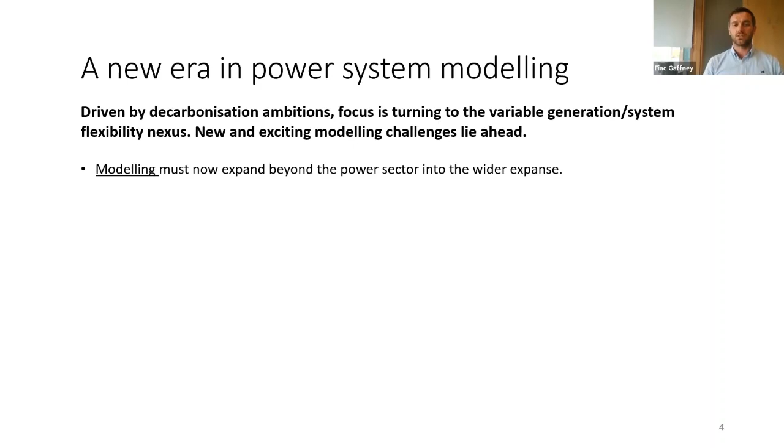And I suppose moving forward, then our focus has to go beyond the power sector. The power sector is the equivalent of around 20% of all energy used. So we need to go wider into the other sectors. To do this, storage is obviously very important, and seasonal storage is really a new challenge for us. And then flexibility in around the demand, and then different types of generation that we're going to talk about, and we have to be ready for when they come online.

And all these things then are brought together when we look at system operation. When you have a lot of variable generation, we have to be able to look at the frequency stability of the power system, and then equally important is the portfolio adequacy, and we will touch upon these things as we go through the presentation.

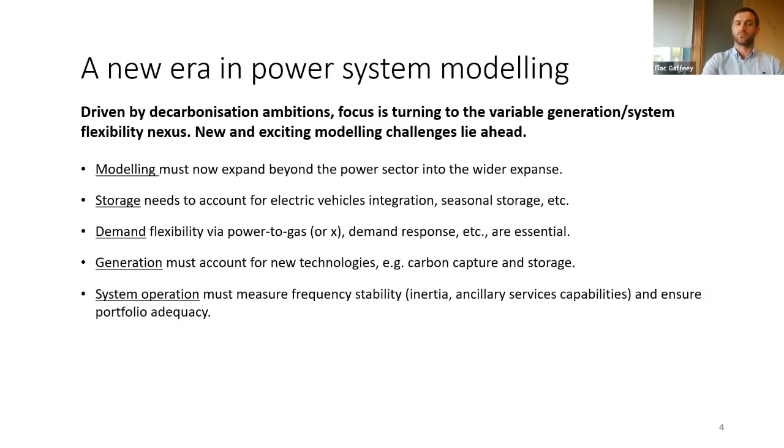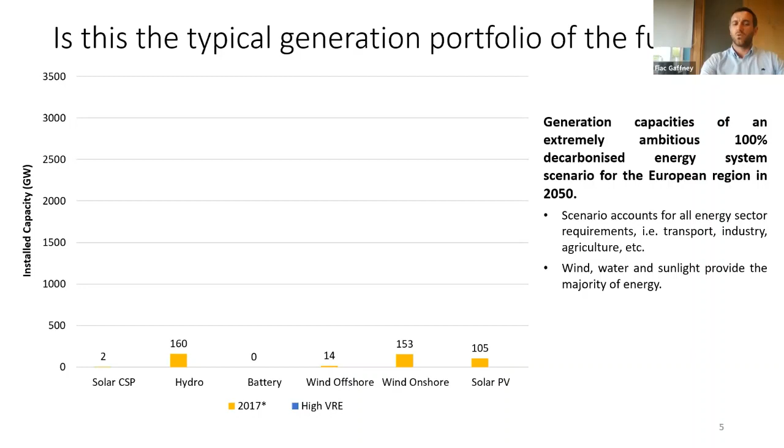Just the next couple of slides, I'm just trying to lay a scenario out that we are modeling at the moment, and it's looking at, I suppose, an extremely ambitious scenario. Sorry, can I? Yeah. So it's a 100% decarbonized energy system for the European region that we're going to look at. And if we just compare to 2017 installed generation capacities, we can see here that there is a significant increase in variable generation. And here, just to draw your focus, that's the equivalent to 82% of the portfolio is variable renewable energy.

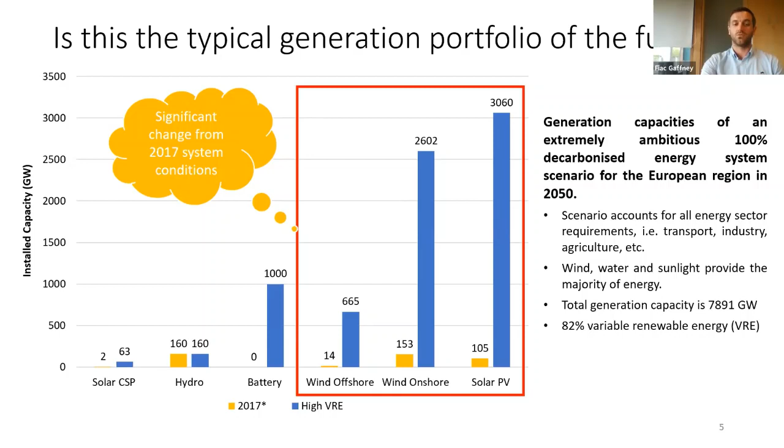This obviously is creating a new need for robust results and for understanding the challenges ahead from an operational point of view alone. When we look at storage then, we compare 2017 numbers, where really we have little or no storage other than pumped hydro. And here I'd like to point out that the STES is short-term energy storage, and the UTES is underground thermal energy storage. So both of these are thermal, but we'll come back to that because they play a large part, especially the underground thermal energy storage.

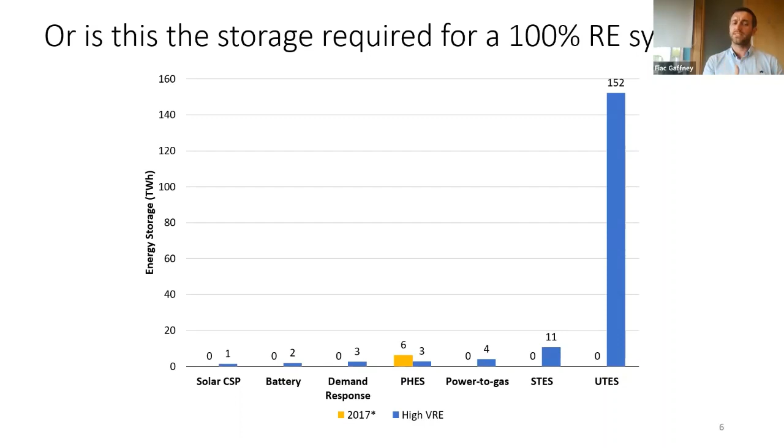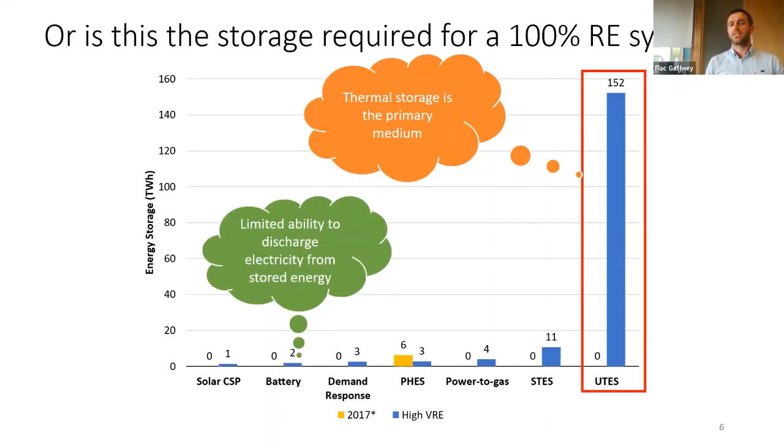So we can compare then the 2017 and this high variable renewable scenario. We can see that a very high percentage of storage is thermal. And that brings its own problems, because if we can't store energy and then convert it back to electricity, we have a big problem. And that's, I suppose, what we are seeing here, that void in technologies that can bring energy back into power. We can assume that power to gas produces hydrogen, which can be converted back. But this is a published scenario that we are aligning with, and they assume that the hydrogen from power to gas is only used for transportation.

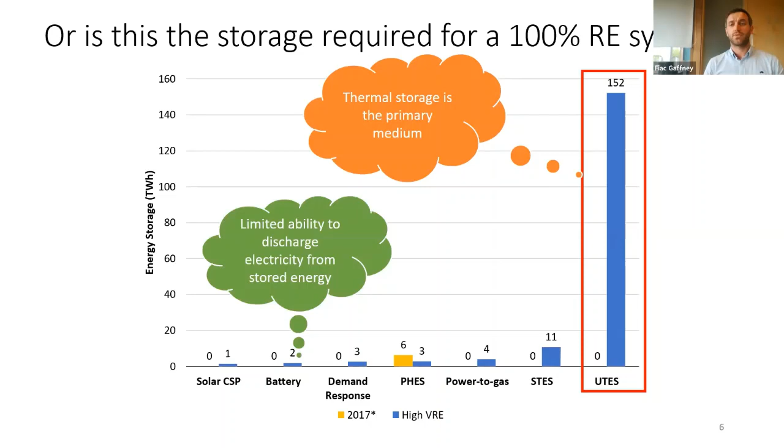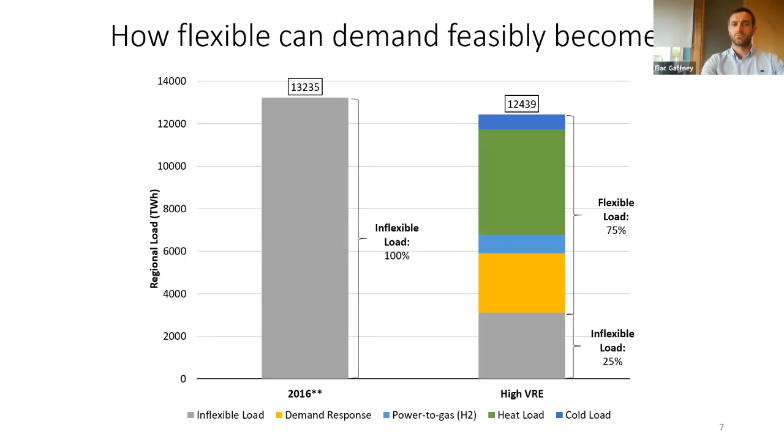So when we model this scenario, we're looking at the entire energy system. The transportation sector is accounted for in the power sector because of electrification of vehicles, and the remainder is based on hydrogen. So we have to look at this thermal aspect and try to include the thermal sector and model that as well as the power sector. And that's what I'm going to show you now, how we actually do this. Inside a region, here we see the French region, and we have two nodes, a power and a heat node. Inside the nodes, the power node is set up exactly like any power system generally would be. You have generators, purchasers, which are demands, batteries, interconnectors.

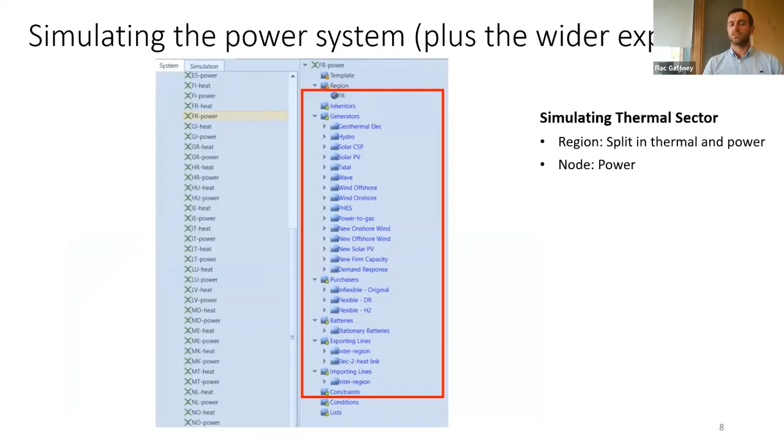It's very standard. Inside the thermal node then, we have thermal generators. So we have geothermal heat, we have solar thermal, and then we have the underground thermal energy storage. We have purchasers, we have batteries, and here, well, we say batteries, but really this is storage, and we use that for short-term energy storage. And excuse me, in the latest versions of PLEXOS, you can actually change the class names, which is fantastic, because it's a way of documenting your model without having to write up a full document. It will help make it understandable to someone that's not used to the model.

Yeah, just jumping in there, Fiac, you folks are probably looking at some of those capacities and going, wow, they look really crazy, really extreme, and they are, and they are like that on purpose for a couple of reasons. One, this is looking at a fully decarbonized energy system, and I think what's really exciting about using PLEXOS this way is that you can jump beyond your comfort zone of just the electrical power system, which is, as Fiac said, 20% of the energy we consume, and look at the other 80% of the problem.

Interestingly enough, as Fiac mentioned, when we started this research maybe a year or two ago, there wasn't a dedicated heat node within PLEXOS, but the newest version of PLEXOS now has a dedicated heat node. So as PLEXOS users, we'd encourage you all to explore some of these things, because it does open up a lot of really exciting avenues for exploring what the future power system, but more importantly, what the future energy system could look like.

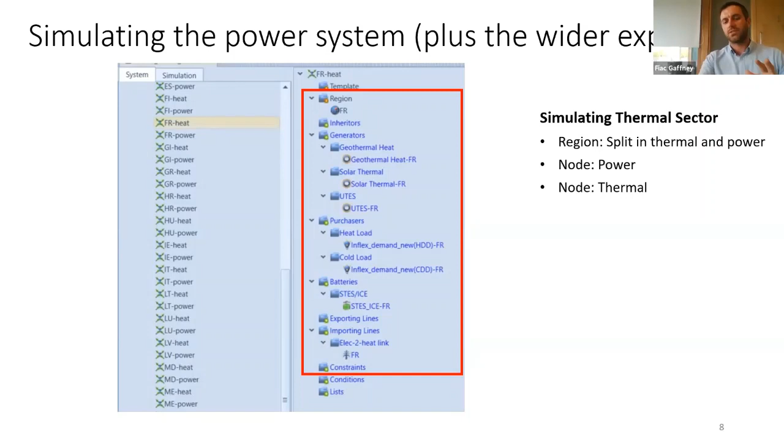And then just to tie off this representation of the thermal sector, there's one missing link, and that is the link between nodes. And that's what we're talking about here. We're going to show the intersectoral unilateral flow of energy. So electricity, if there's excess electricity, rather than curtail that energy, it is stored as thermal energy in seasonal storages that are outlined by the source material.

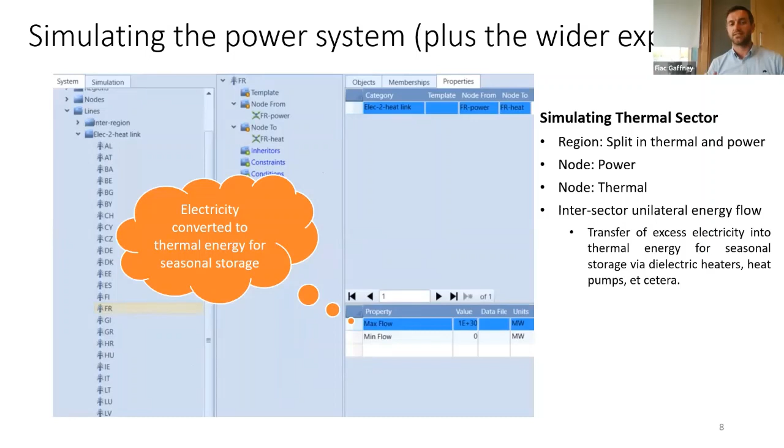And how that transformation happens is through dielectric heaters, high efficiency heat pumps, these sort of technologies that are already on the market. So what we're seeing here is that if there is excess electricity, it can be stored as thermal, but it cannot be reversed. And that's the key point that we're trying to get across. So that's a very, it's an important assumption.

Yeah, and this is one of the fun things you can do with PLEXOS, with the ability to have your own constraints. And I guess one of the lessons we learned pretty early on is, if you're going to put in constraints like this, it's really fundamentally important to have a look at the LP equations. Look at the linear programming equations through the inactive diagnostic.

And there's a really cool feature that Energy Exemplar posted up on their website, where they have a syntax reader. You can incorporate that into your text editor, and that really makes life reading the LP files a lot easier, because sometimes those constraints can be quite tricky. They might not be doing what you think they're doing. So if you are setting up new constraints with different technologies, new technologies, it's really worthwhile to have a look at the fundamental equations driving those before they get to the optimizer using the LP viewer.

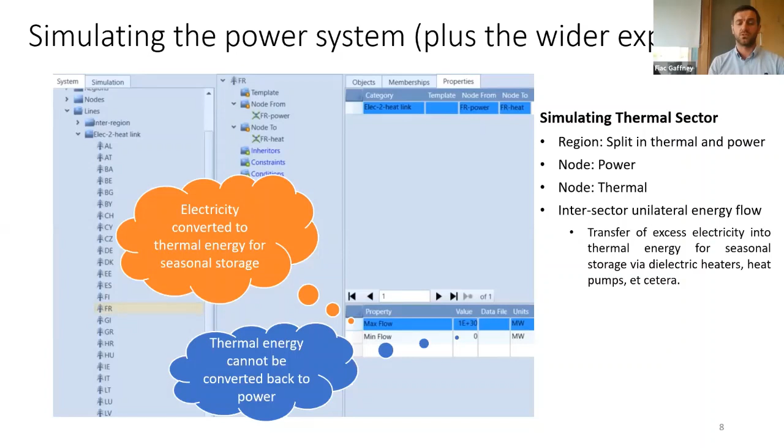And it's often better using a small model, isn't it? The smaller the model, the easier, the more transparent things are. And that's what we try and do with pretty much every new technique that we use, because otherwise you just get lost in the data.

So in terms of flexible demand, this is modeled in a different way. What we do here is a unique approach, but I'll talk you through it in a moment. So hydrogen here, the assumptions are that hydrogen is created from power to gas for transportation purposes only, and not demand response. And one of the key things I want to get across is that demand must be met using previously stored hydrogen, or hydrogen converted at the time of demand.

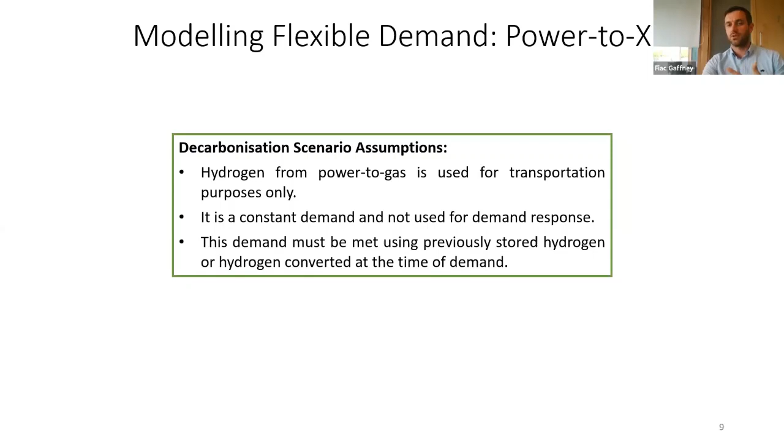And that may seem obvious, but it is very important to remember when you're setting up flexible demand in the way we do, which may not be the correct way, but this is the way we do it. So our approach is that flexible demand is modeled in two individual parts. Firstly, you have the demand, which is static; it's in the purchaser class, just the way any demand may be. And in this scenario, it's a constant load.

We assume that hydrogen is needed all across the year at the same demand. However, you can input a CSV file here with a profile. It doesn't really matter to us. It's more about aligning with the approach that we are trying to replicate.

Flexibility then is the next thing, and flexibility is modeled in the same way as pumped hydro is, where you have an upper and lower storage connected with a turbine in between. And this is the way battery technology used to be represented in PLEXOS until the battery class was created. So here we can see the max capacity is 102 gigawatt hours, and that is aligning with your assumptions.

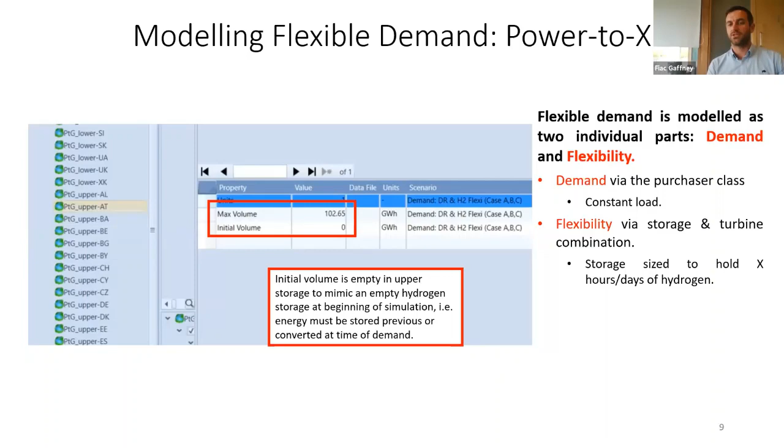However, what I would draw your attention to is the initial volume is 0. So the upper storage, which we're looking at, is empty at the start of the simulation, and then that has to fill up before it can be used. We can see here that the lower storage is full, so it's ready to pump up. And this is just something that we wanted to mention before we move on.

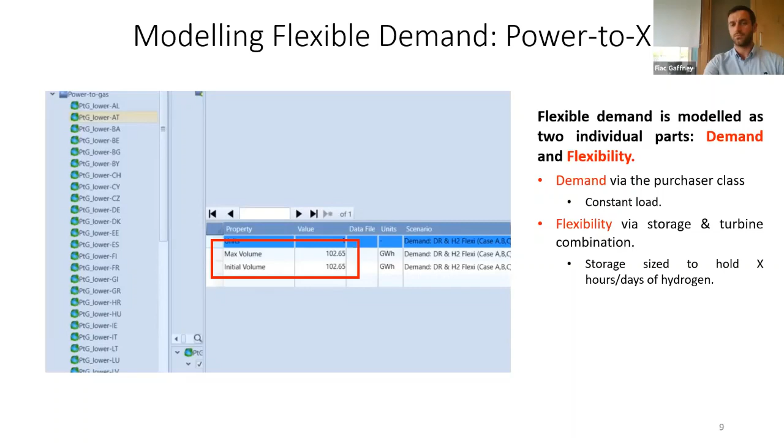Yeah, I guess maybe just jumping in there, Fiac, that's something that we'd probably like to see in future versions of PLEXOS, this power to X class. As Fiac said, before a lot of us were modeling things like batteries using dummy pump storage technologies, and that's fine, but often when PLEXOS incorporates those things as a fixed class, it just makes the whole thing a little bit more elegant, a bit more tidy, and a little less clumsy. So maybe power to X is one of those things.

Certainly not within the investment cycle, but it's probably coming through in the next maybe 10, 12 years, probably in Europe. So that's something maybe that we could think about as a community as well, I guess.

Yeah. And finally, just to tie off the link, to show you the link between the demand and the flexibility when you're replicating this, is the fixed load for the turbine that's associated with that storage. That has the same fixed load as the demand. So what we're saying here is that demand is

2.138 gigawatts constant, and the output of that turbine, which has flexibility incorporated because it has an upper storage and lower storage, has the same output. So that's the link, the missing link, if you were maybe struggling to find out how they work together.

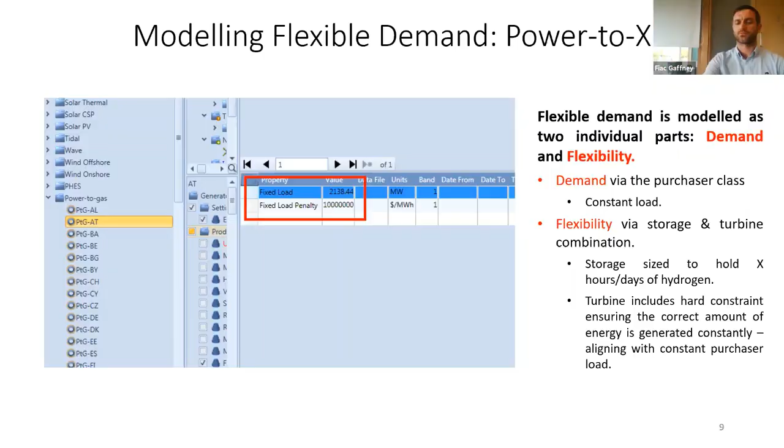So next, from an operational perspective, we're going to look at, when you have a system that is 82% variable renewable energy, the questions are, where's the inertia coming from? How can you control such a system that has very little synchronous energy? And that's what we're going to look at here. We're going to focus on the Central European continental synchronous area.

What we then do is add some dispatchable power. Approximately 8% of installed capacity is replaced with dispatchable capacity. And we do not talk really about what type of dispatchable power, because it's all about the effects of it, whether it's nuclear, CCS, coal, whatever.

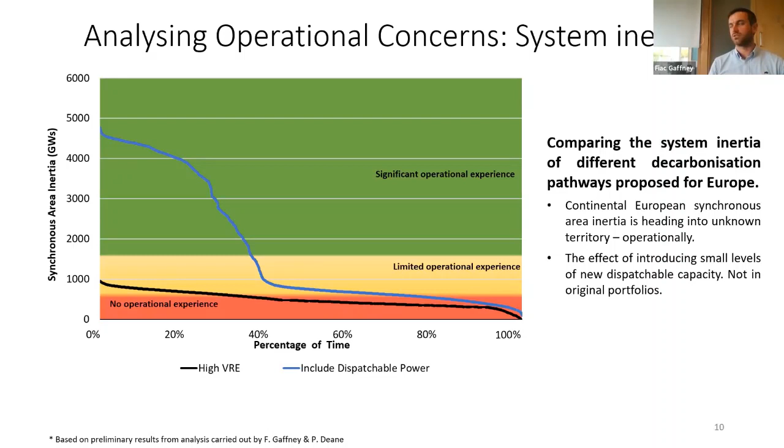I guess what's nice about this technique is that while PLEXOS isn't a dynamic electricity modeling package in terms of some of this sub-grid stuff, looking at issues like inertia or RoCoF is very useful in PLEXOS, because it's about raising flags. So if you're dipping into that red zone, that means, okay, I need to start worrying about this issue in a lot more detail.

So certainly I think the work that Fiac has done here is very insightful for understanding where the power system can comfortably operate and where that becomes a little bit more tricky and challenging.

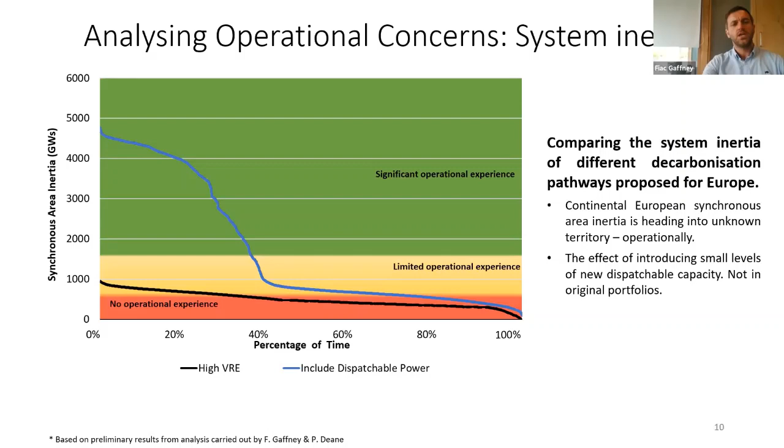Yeah. So next we're going to look at ancillary services, because again, going back to our scenario where 82% of installed capacity is variable renewables, the questions then are who's providing reserve and how. So to lay a little bit of background, we are looking at a combination reserve which combines secondary, tertiary and replacement reserves. And we are focusing on upward regulation because it's the more challenging, because for downward regulation, you can possibly curtail and just dispatch down plants.

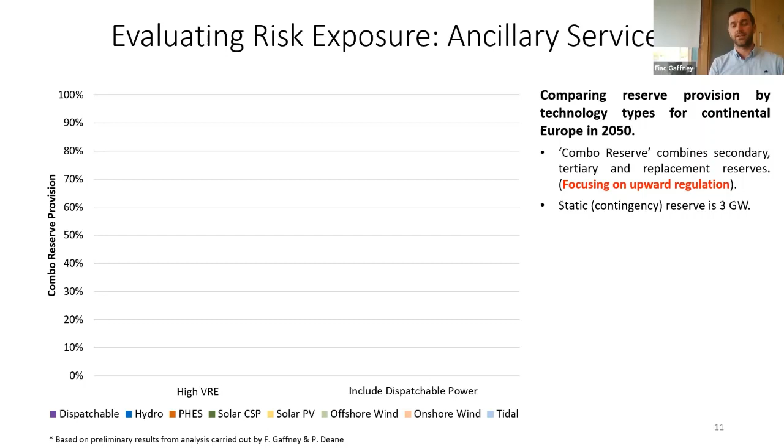So there's two things I want to talk about. The first thing is that we assume a static reserve of 3 gigawatts for mainland Europe. And then, this is something unique, we're setting a dynamic reserve, which is a percentage of generating variable renewable energy. This methodology is from published data, and we use a very unique way of setting this reserve, which we'll talk about in the next slide.

But in this slide, we just want to point out who is providing the reserve, what are the issues, and then what are the effects if we tweak that with a little bit of dispatchable power.

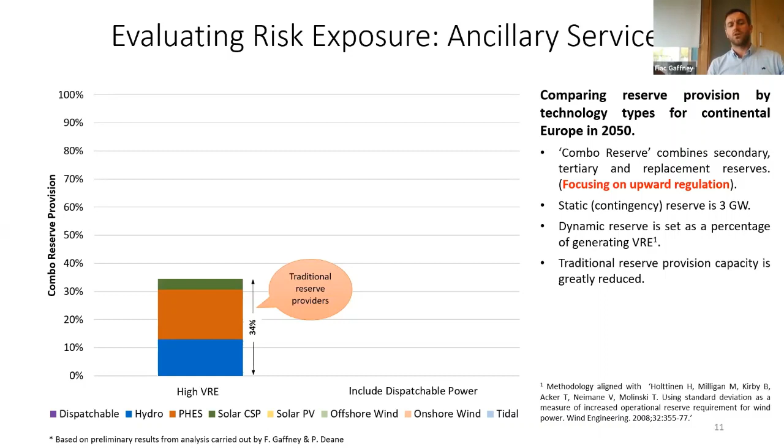So here, first of all, we're looking at the high VRE scenario, and I've grouped together 3 generation types that I call traditional reserve providers. And it's not very accurate, because pumped hydro is traditional, we know how that works. Concentrated solar power is a technology we understand, and that's why it's grouped there, because the alternative 66% comes from deloading variable renewable generation.

And just to identify what that exactly is: if you have a wind farm that can produce 100 gigawatts, or is forecast to generate 100 gigawatts in hour 1 in any day, that could be deloaded back to say 90% of that, with that 10% there for upregulation, for injecting power into the system. And that's kind of unknown territory. There are a lot of pros and cons to that, but it's just unknown territory really is what we're saying, and we're trying to flag these issues with such an approach.

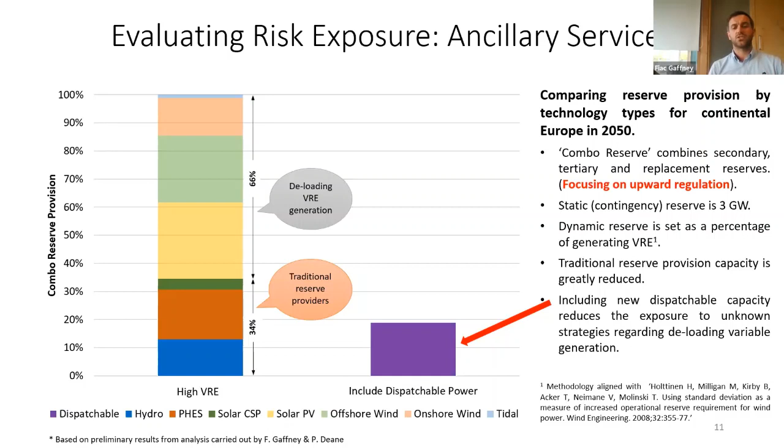So what we do then is we suggest a level of dispatchable generation, as we did in the last slide. So here we say, if there was that 8% of dispatchable power, it provides nearly 20% of the reserve requirements, but there's a knock-on effect that because this power is generating, it's displacing some of the hydro and pumped hydro and solar CSP generation, and then that can be kept for reserve. And as we see here, instead of it being 34% of reserve coming from traditional sources, it's now 85%. So the risk here is much lower in terms of the unknown strategies of how to deload variable renewable energy.

What I like actually about the way Fiac has set this up is that because it's an integrated overview on the full energy system, there's also things like power to gas in there. So in Europe at the moment, we hear a lot of business cases about maybe curtailed renewable energy being sent for free to provide power to gas. But this decision support tool that Fiac has set up here also allows us to understand if you are a wind farm operator, well, if you deload your generation, rather than send your electricity for free for power to gas, maybe there's a bit more financial gain from actually deloading that and holding it as a reserve capacity as well. So I think that's a nice and new insight coming from this analysis, and it raises new questions.

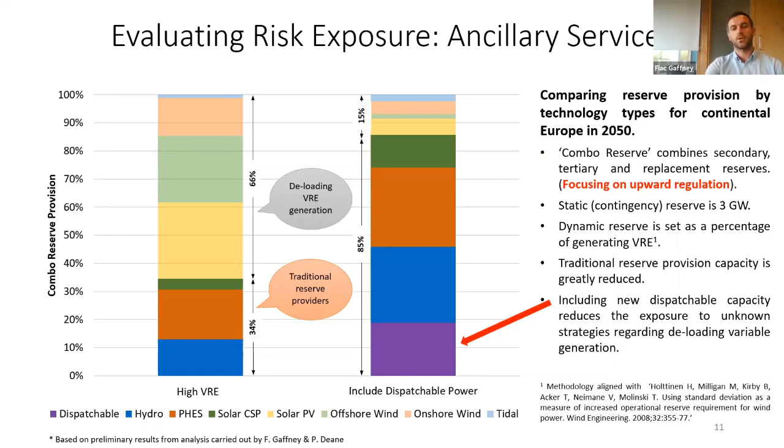Now, how we actually implement this in the software is in PLEXOS, so we're looking at using variable renewable energy to set the reserve contingency. So here, first of all, we use a dummy generator, and this dummy generator is going to be a signal to reserve and tell the reserve how much it needs to account for as a dynamic reserve. And here we set a dummy generator, and the main thing here is that the max capacity is larger than the combination of variable renewables in a given area. And a given area is whatever area you are talking about in terms of the reserve. For the UK or GB, it would be Great Britain and the accumulation of variable renewables in that area.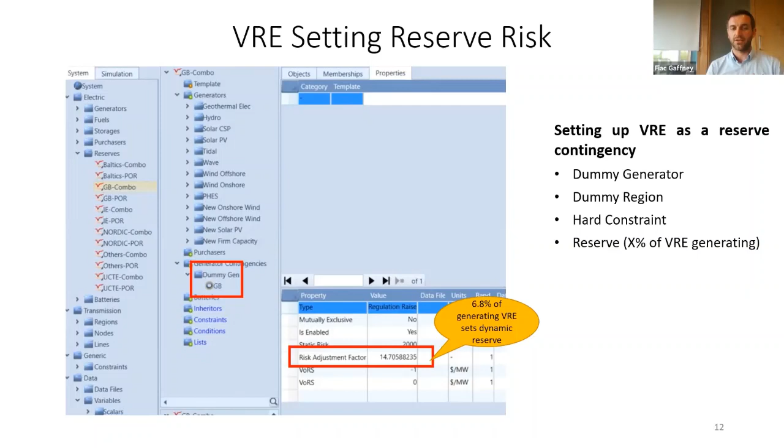Now, the next section, we're going to talk a little bit about the robustness of results. And what we're talking about here is going back to this scenario that we're talking about throughout, where we have high levels of variable renewable energy. When you have a lot of weather-dependent generation, it means you have a lot of variability, and to account for that, you need loads of sensitivities, and the robustness of results really needs to improve. And this is what we are trying to show you, how we approach this.

So we use a multi-sample approach for power generation representation, and we're looking at interannual wind and solar variations. So we're taking profiles for over 30 years, so we use 30 years, but you can use as many as you like; that's only dependent on the data you have. Here's two examples of publicly available data sources, which are fantastic sources to use if you want to even trial this approach.

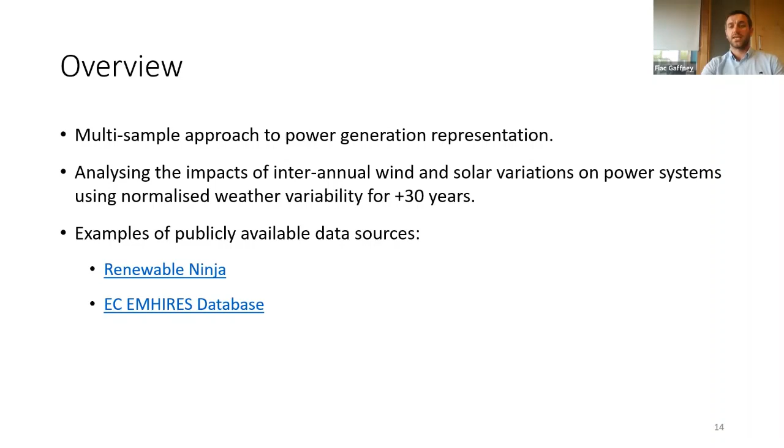So one of our colleagues, Sean Collins, published a fantastic paper in the Joule journal in 2018, where he's looking at the impacts of interannual wind and solar variations on the European power system. The scenarios he's using are from the European network of TSOs, and it's all about decarbonisation and different trajectories. And we'll talk through just a couple of his findings, which graphically is very rich.

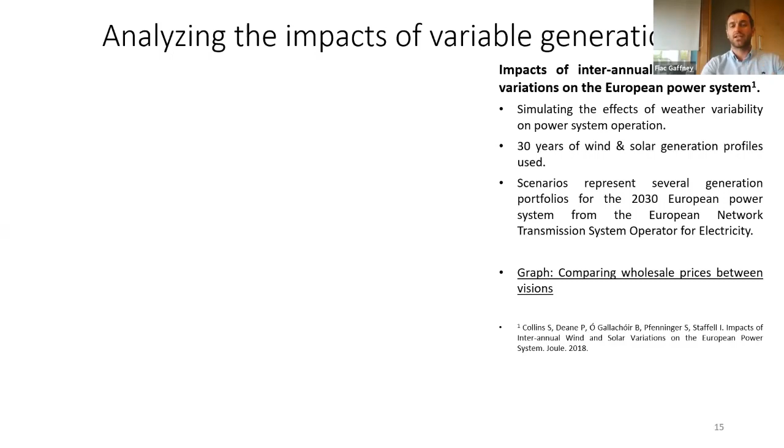So here we are looking at the wholesale pricing of the counterfactual. Along the horizontal, we have the penetration of variable renewable energy, and on the vertical, it's the wholesale pricing. What we actually see here is a clustering effect of the 30 samples, and that is just down to the installed capacity, and then we just use the different profiles for the last 30 years. From this clustering you can get confidence, because we can find out the mean, the standard deviation, the min, the max. All this data is there, and that's just one scenario. You can compare that then to a second, a third, a fourth, a fifth, and this is all fantastic stuff because it's very rich in detail.

It gives you confidence. If I was an investor into a market, you look at this and you have some idea of where wholesale prices are going to go as the penetration increases, all else being equal. And the thing here is that we're entering a new world where there's lots of variable renewable energy. I'm not sure what Paul thinks, but using single profiles doesn't really cut it anymore. For robustness, you may need to add that extra level of detail.

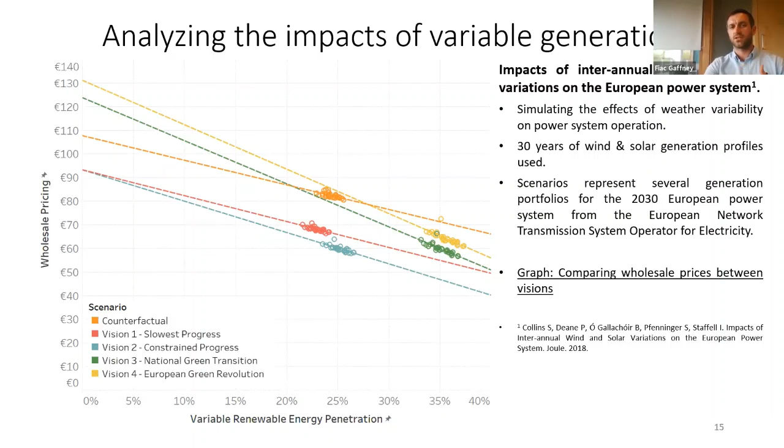So moving on then, this is also from Sean's paper where he looks at the CO2 intensity. Again, we're just going to touch on this for a moment, but you can see from the 5 scenarios this clustering of results where you can get your mean, your standard deviation. It just provides confidence, is the best word I can use, in your results.

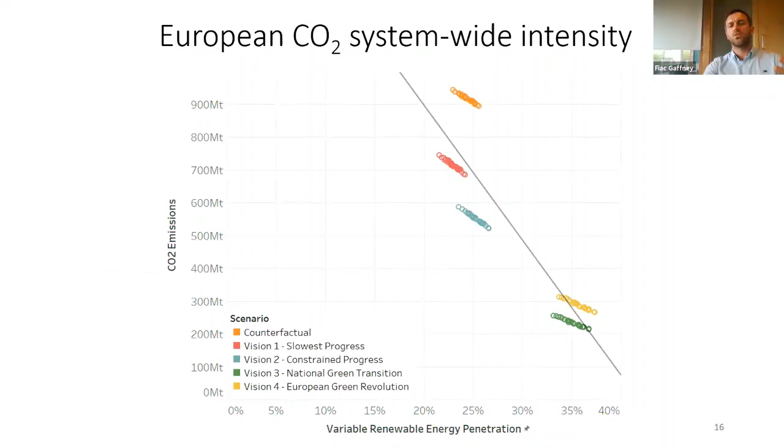So now we'll just talk about, oh no, sorry, one more slide. This is based on results Paul and myself are currently working on. This is the same scenario as we talked about earlier, and here we have 30 individual samples as columns. This is the level of variable generation of total energy system demand, a little over 80%. When we add dispatchable power to this, it's about 90%.

But straight away, you can see that there's an adequacy problem. So you can have questions then: is the portfolio not adequate? Why is it not adequate? Is there not enough storage? And then we see, well, curtailment is actually low, so even if there was more storage, we wouldn't solve the problem. So a lot of questions can be answered, or can arise, from this sort of analysis. From a regulator's, an operator's, or an investor's point of view, you can see opportunities, and that's really what we are seeing with this sort of work.

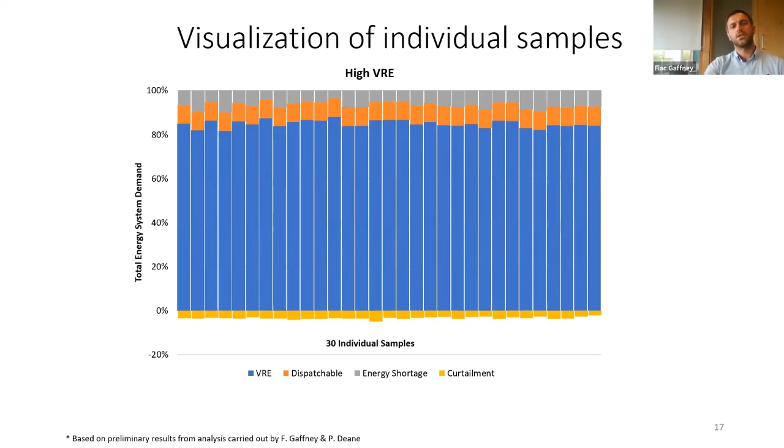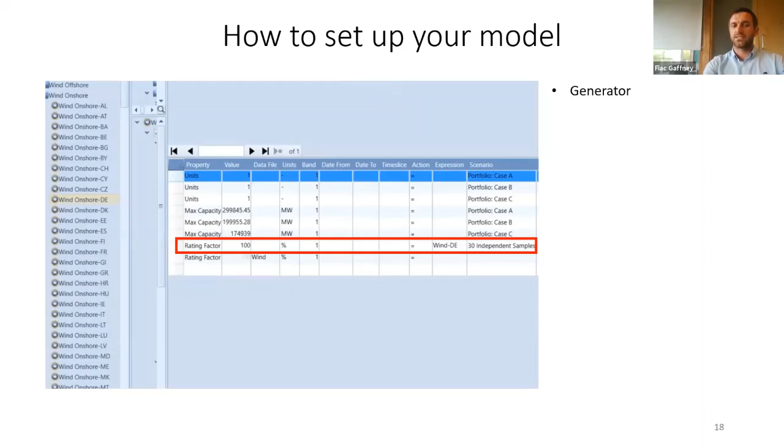So next, we'll just talk about how you actually set this up in your model, and it is very straightforward. First of all, from the generator perspective, you set up the rating factor equal to a variable. Here, this is the German onshore wind, so wind-DE is a variable. And then in the variable itself, the sampling method is user and the profile is a normal CSV.

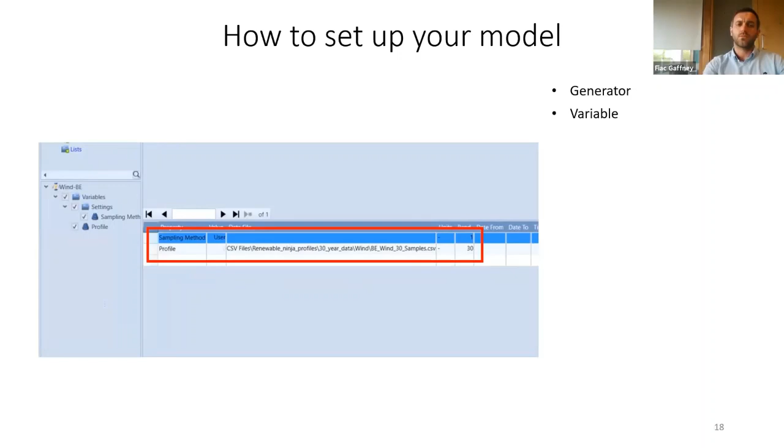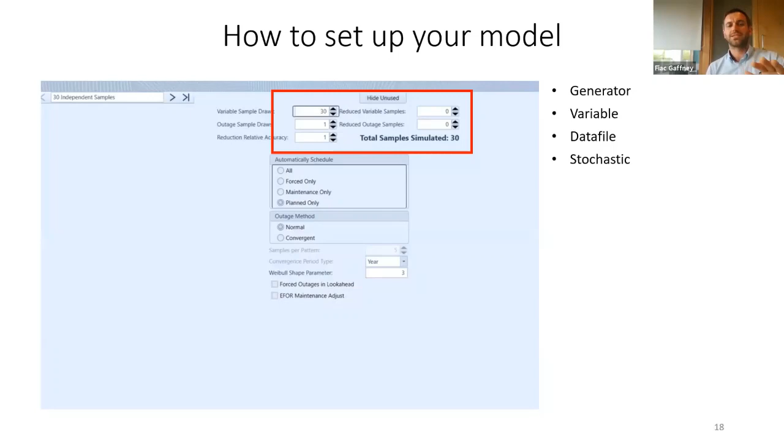The CSV is set up as per normal. It's just with the columns 1 to 30 in this case. And then we go on to the stochastic settings. And this is really where you just need to know a little bit, and that the variable sample draw is set to 30, so you have 30 samples running. And the next thing then is that in PLEXOS we're using the independent samples in parallel, and that's a key part of what we're trying to do.

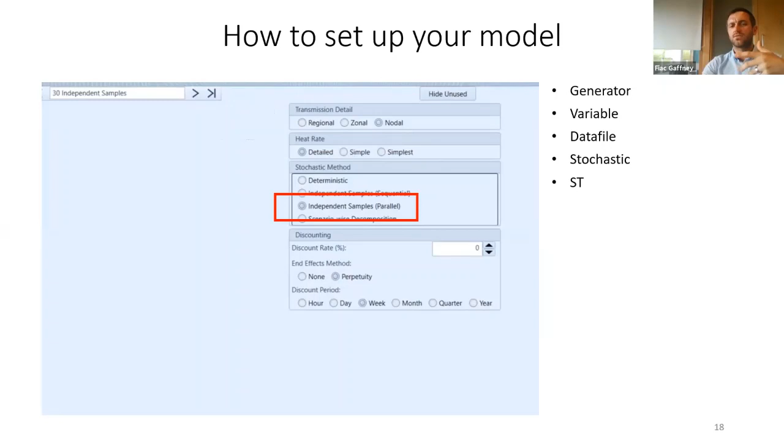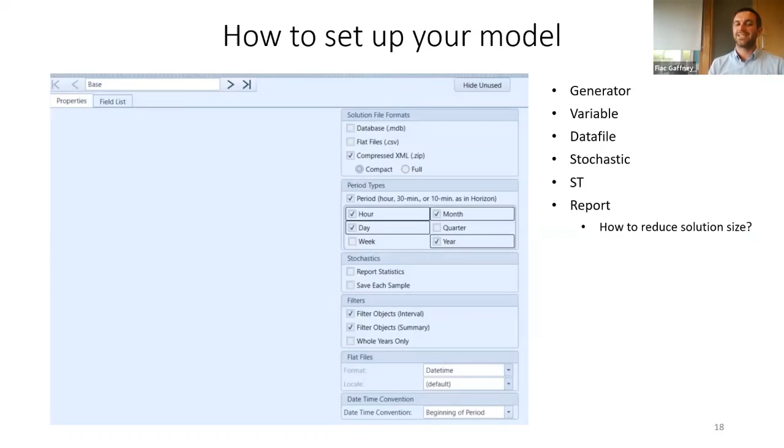From our experience, one of the things that we realized is around the reporting. This is just our experience, sharing it: what we found was when you model using this sort of approach, you have 30 times the results. And what we found is that sometimes you don't always need all the period types. So what we did is we just deselected some of them. You don't have to do this, but it just helps with the solution size, because sometimes that can be very, very large.

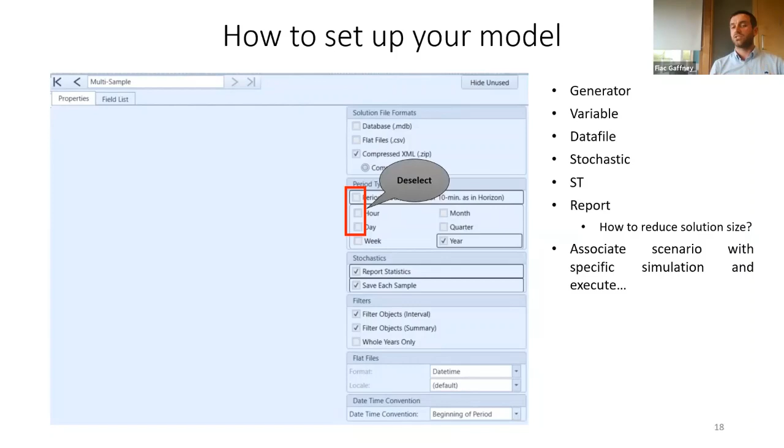So then afterwards, it's just a case of associating the scenario and the specific simulation, and then you execute, and that's really it. And that's really powerful. Fiac has talked about that in terms of weather, but that could be anything. Those independent samples could be carbon prices, fuel prices, demand. There's really a big, rich landscape to explore there with the independent samples method.

Oh yeah, actually, a nice feature in PLEXOS 8, the most recent version, which came out maybe a couple of weeks ago. I think the data handling abilities are absolutely phenomenal. A lot of traditional users would have hundreds or thousands of individual CSV files linked to individual wind farms or power plants. But the new data handling capabilities in PLEXOS 8 allow you pretty much to store all those in one CSV file, whatever your computer can handle in terms of memory.

And that's a real nice feature in terms of reducing the risk of human error, and also keeping your model nice and elegant and nice and clean. And it really gobbles up those data files really, really quickly and runs through the validation. So that's something we'd encourage users to check out as well.

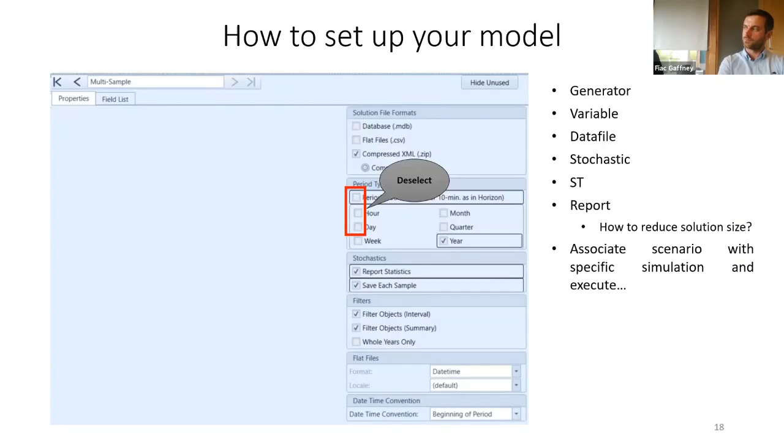And now we move on to the last section, which is high temporal resolution modeling. From my perspective, when I started modeling, we were always looking at hourly resolution models, and that's more reflective of market conditions and how a unit or a system is dispatched. But the world we're going into with a lot of variable renewables, we kind of need to start looking from an operational perspective in a little bit more detail, and that's why we are looking at 5-minute resolution modeling.

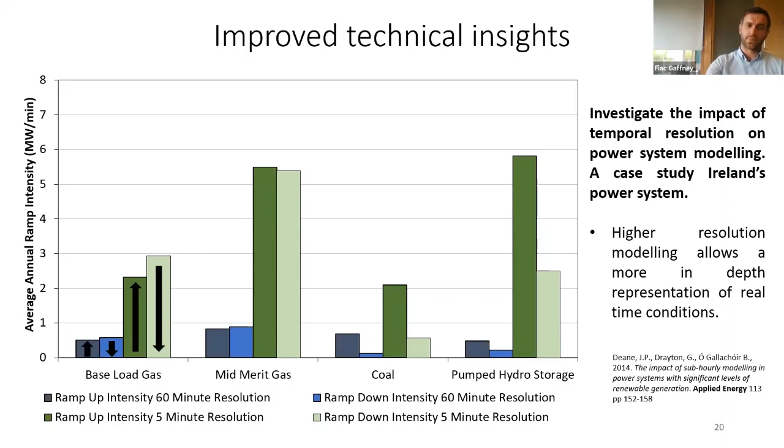The next thing now is we just kind of look at the system costs, and when you increase the resolution, what you get is, I suppose, a capture of more of the system costs. For example, we have recently finished a paper that's in review, and the difference between 60-minute and 5-minute resolution is 4.5 billion euros. That's the equivalent of 3% of overall variable costs.

And of that 3%, 1% is associated with startup costs, and the other 2 is around fuel costs and carbon. Because at the end of the day, when you are ramping your plant around, you're less efficient, so there's more of a fuel burn or fuel offtake, and then this equates to more costs, and there are a lot of knock-on effects from here.

Yeah, and this is really important actually, as Fiac said. If you're trying to understand flexibility in the power system, it's also important that you capture inflexibility. So if you have some legacy steam plants, or if you have some quick start OCGTs, you capture their technical characteristics quite adequately. And as Fiac will show next, actually, 4.5 billion. That's quite a sum of money.

Okay, it's small in percentage terms, and that's, I guess, one of the things. If you're interested in aggregate costs only at national level, you're probably not going to see a big difference in absolute changes between different scenarios. But if you're someone who's interested in storage, flexibility, those types of assets, then the 5-minute resolution modeling is something that you should really explore, and it's pretty easy to set up.

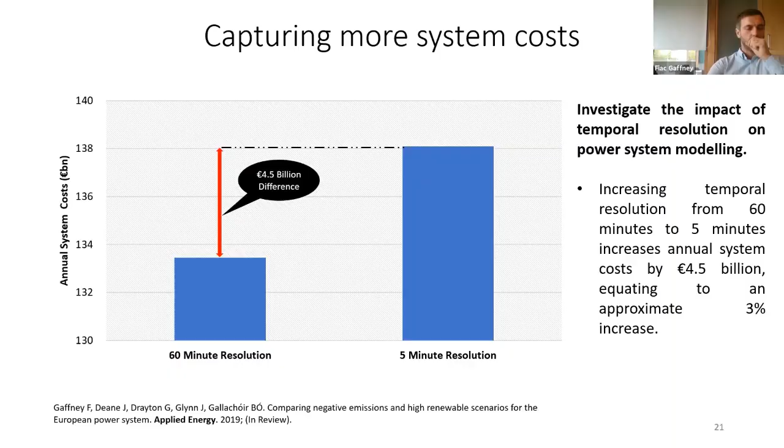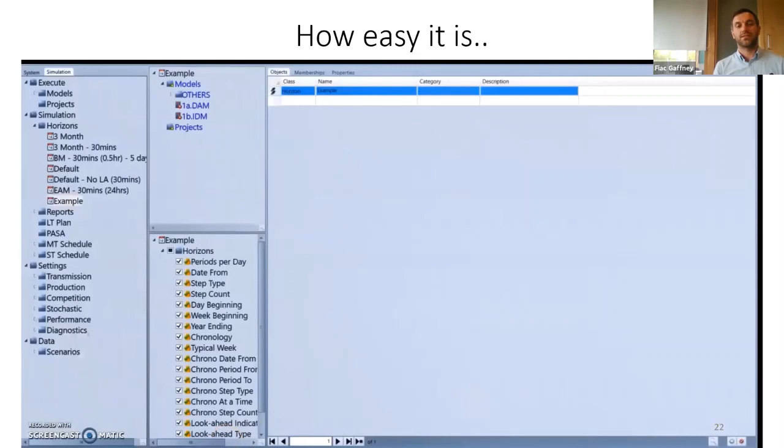Yeah, it is. So the next thing here, we're just going to show you how easy it is to actually change the temporal resolution. This is a short video, it's only 10 seconds long. So you get your horizon, you double click, and then there's a simple drop down menu, and you press OK. And that's really how complex it gets from the front end. But then there are limitations, but they're more machine based, which is different. So you might have to structure your model a little bit differently.

We recently were working with Glenn Drayton on a paper, and he suggested that we nest one model into a different model based on their temporal resolutions. So here we can interleave a 60-minute model and a 5-minute model, and the 5-minute is nested into the 60-minute. What it actually does is the 60-minute model creates a unit commitment for all the big coal and CCGT units, and then passes that to the 5-minute simulation.

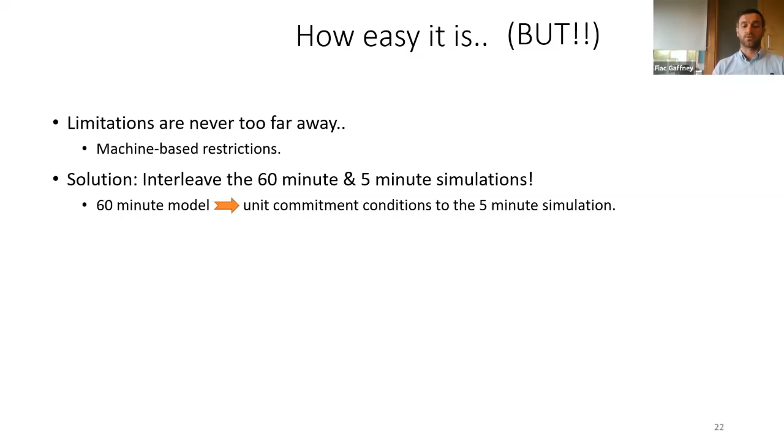So then the 5-minute simulation, all it has to do is decide what level of output it needs to be at, and not whether it's on or off. So that simplifies the problem a lot. What we also did was we shortened the horizon on the 5-minute simulation. And this, again, is just to reduce the problem size. And I'll show you how that was done next.

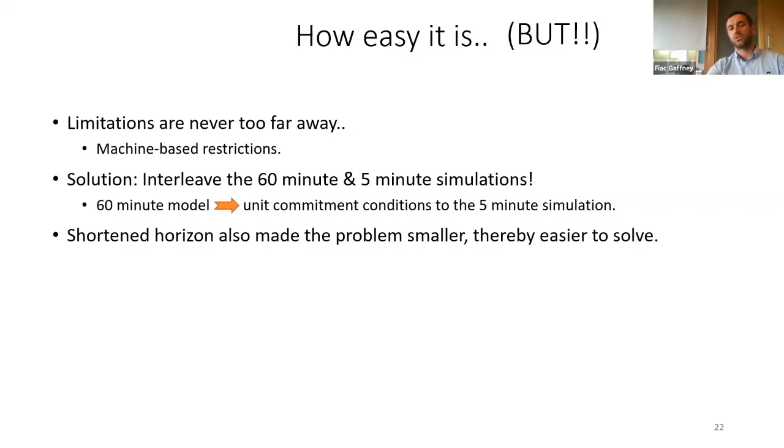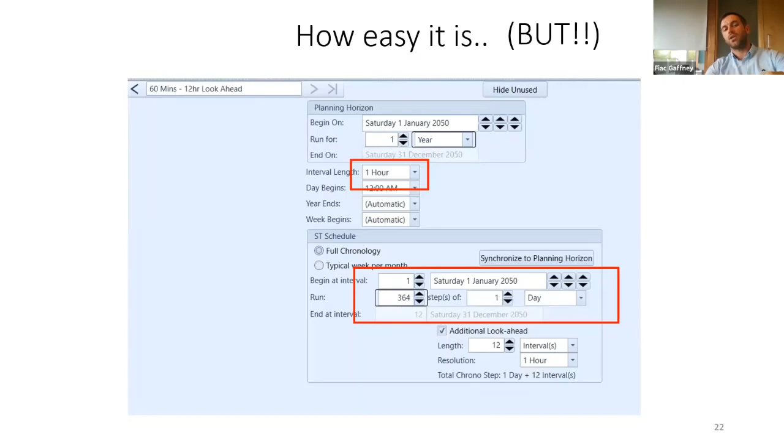So here we can see, this is in the hourly, the 60-minute resolution. We can see that it's hourly, and the steps are of 1 day. When we change to the 5-minute resolution, we can see that the steps are now 6-hour steps with a longer look ahead. The look ahead is 18 hours. Because when you're interleaving models, each day is run in step. In this case, the 60-minute model would run for 1 day, and then the 5-minute model will have four simulations to equal that, and then we'll go to day 2.

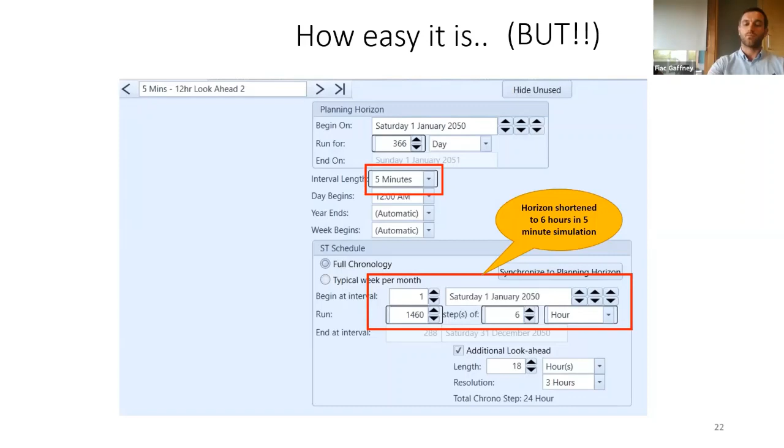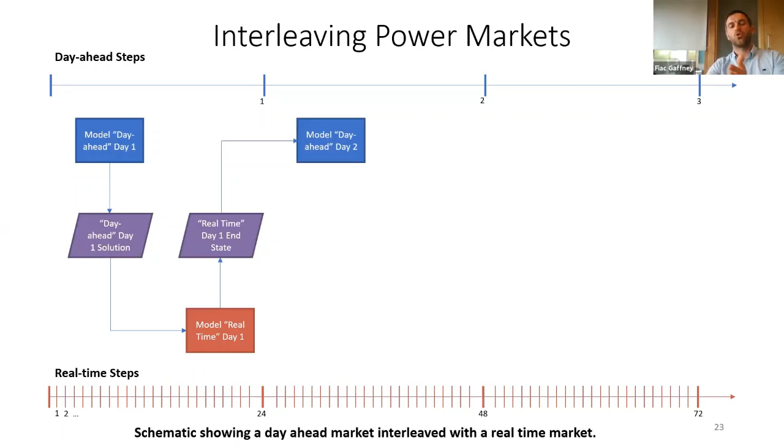Then our 5-minute model, which here we call a real-time model, creates a solution, and that is passed back into the 60-minute model at day 2. And then they're run in step the whole way through until the end of your horizon.

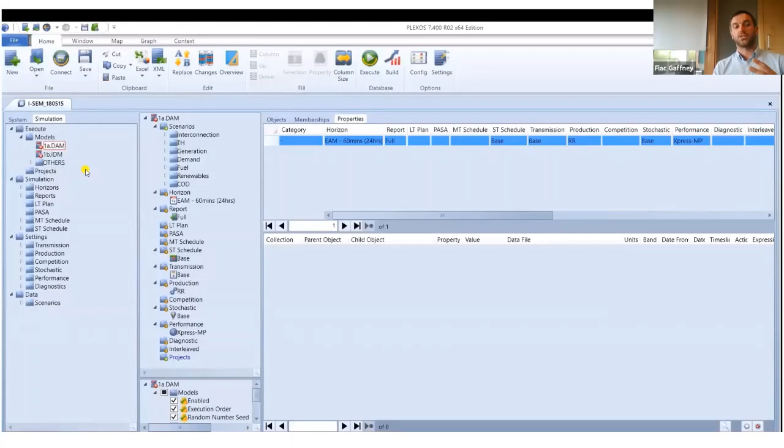And finally, this is our last slide. Here's just a short video on how you actually interleave models. It doesn't show you how you can decide exactly what you want to pass through, because you can send through exactly what you want, or it's more linked in terms of their end state. So here we can see that the horizon, the planning, is 1 week, and we're running it for 3 days. So we execute this. This is just a day ahead on its own.